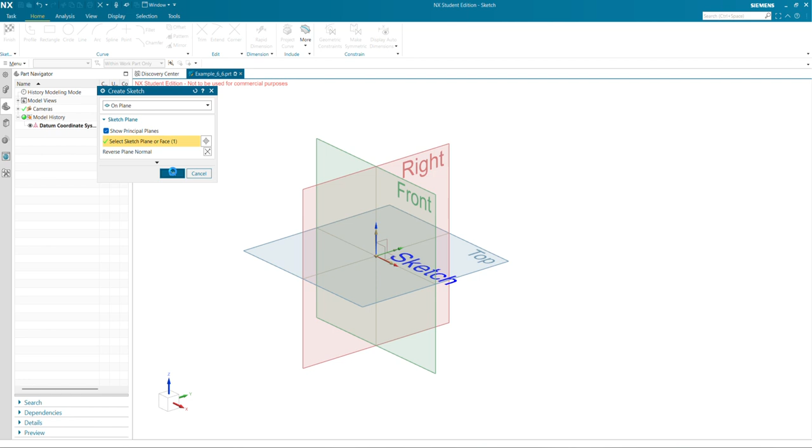So I'm going to start my sketch on the top view. There we have two circles of diameter 36. You'll see that circle has a diameter of 36, so I'm just going to create two circles with diameter 36.

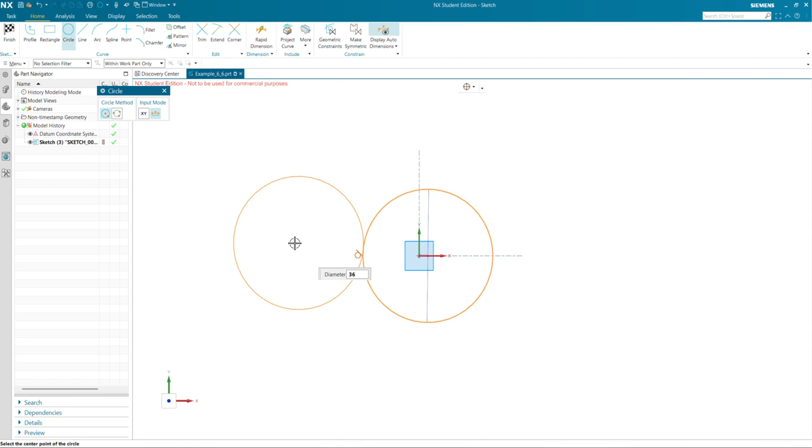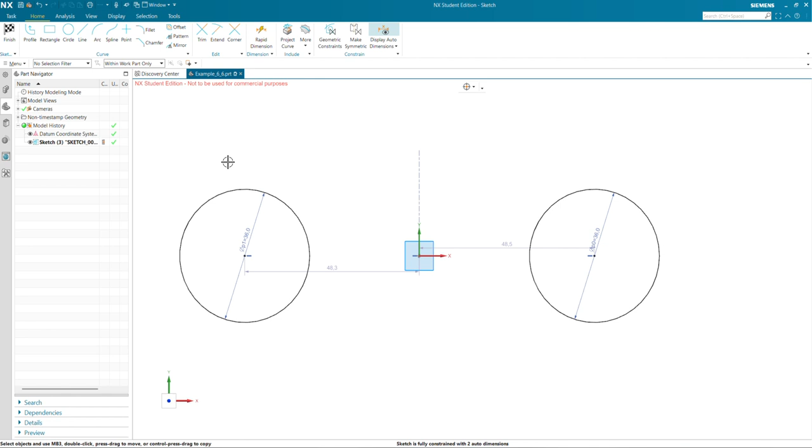Zoomed in a bit too much there. Just move. Okay, so I'm going to geometrically constrain them horizontally with the sketch origin, not point on curve. Inside, and then we have a dimension of 22.5 millimeters between them, so from that point there up until that point needs to be 22.5. Now it just needs one constraint because it can still move in the x-axis.

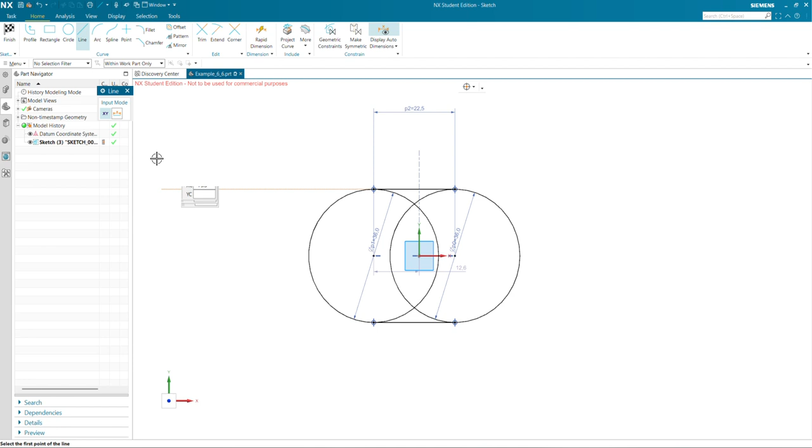To add that, I'm going to add a line between these two curves first, tangent to the curve of the circle, from there to that point, and then use my trim feature to trim away those lines. Now we still need that one dimension, so I'm just going to vertically constrain that point and the sketch origin. So that's the outer circle created.

I'm quickly going to create the inner circles as well, because they are extruded straight through. There are other ways of creating this - you can use a rectangle and then just use the fillet feature, but I think this method is the easiest.

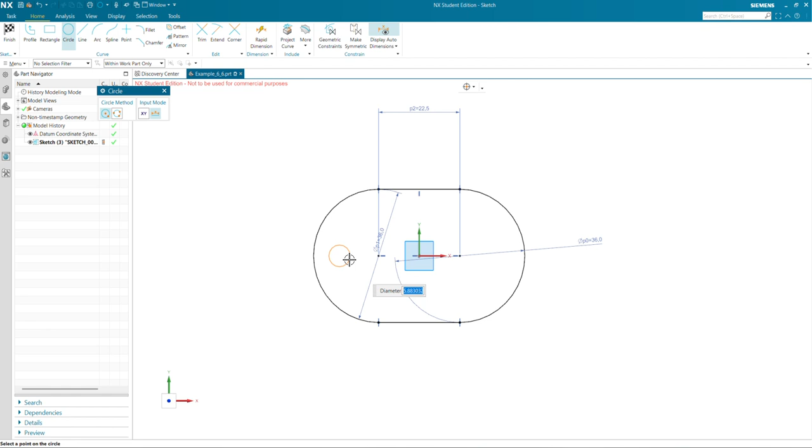So those circles have a diameter of 3 millimeters. I'm going to create them here - one there, and there as well. These need to be vertically in line with the sketch origin, or that point there. Once again, it's important to note where your datum coordinate system is. From the top view it's in the middle, from the front view it's also at that point, which is 5 millimeters from the bottom.

So that will also influence to which side I extrude this sketch of mine.

Okay, so then we have dimensions there of 13 and 13. So rapid dimension from that point there to that point needs to be 13, and from there to there needs to be 13. And then first geometrically constrain this one, and that distance I also know is 13 millimeters.

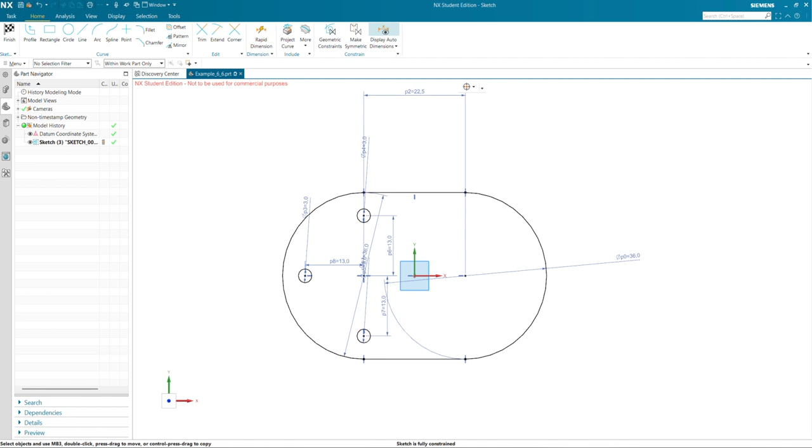Okay, so now it's supposed to be fully constrained. If it's not fully constrained, you either missed a dimension or missed a geometric constraint, which we cannot show you on the sketch, but it needs to come from intuition. So sketches should always be fully constrained, and I encourage you to keep it fully constrained as you go on with the sketch - don't try to make it fully constrained only at the end.

So I'm quickly going to mirror these curves - those three circles, with my center line being the y-axis. Okay, now I can finish that.

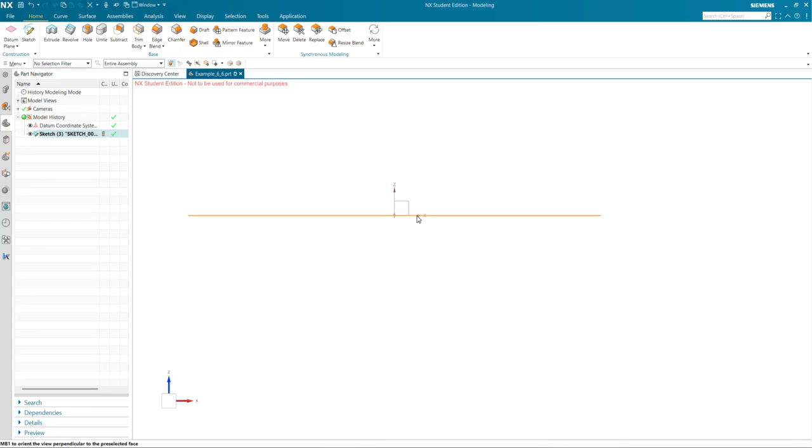So now you'll see my sketch is at that datum coordinate system, in the middle there. So to get it at the top there, I need to extrude the sketch downwards. So I'm just going to extrude it 5 millimeters to the bottom.

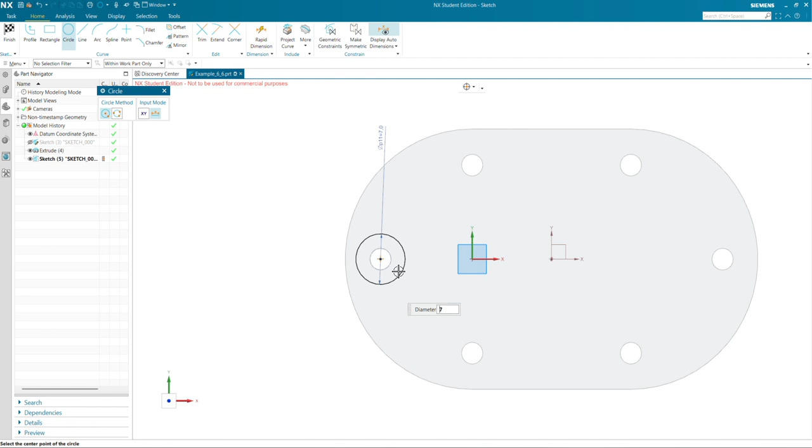Next, I'm quickly going to create those sunk in holes of 1 millimeter going down. So on that face, I'm going to create the sketch. Diameter of that is 7 millimeters. So there's one, there's one, there's one. So that one is constrained.

These two need to be constrained. So that's 13 millimeters, and that is 13 millimeters, and then also they need to be vertically in line with the sketch origin. Okay, sketch is fully constrained. Just mirror these.

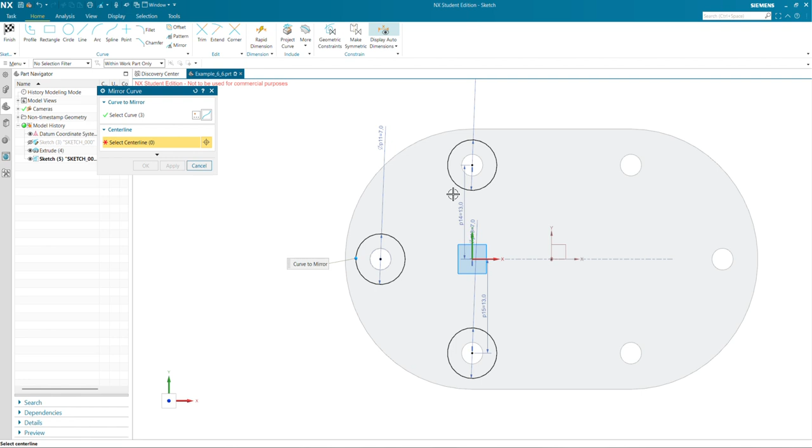It's easy as that, so use my extrude feature. They are 1 millimeter, and going to the other side using the infer tool to subtract them from that extrude.

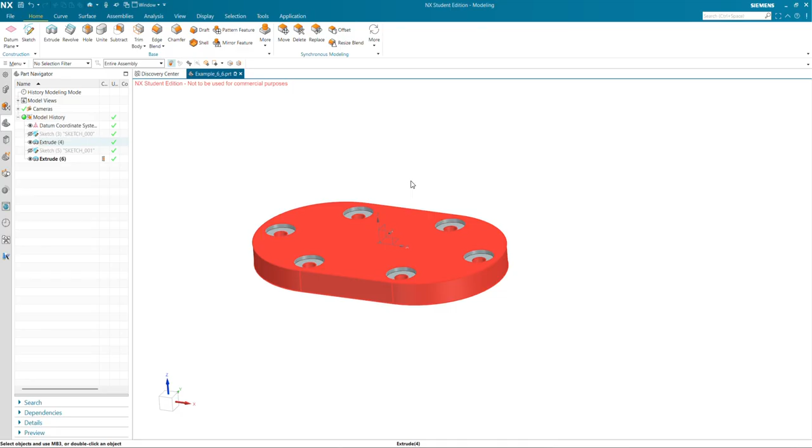The next part we can add is that oval there. It has a diameter of 15 millimeters, so I'm going to create it the same way as I've created this larger base part. Diameter 15 millimeters, so two circles, 15 and 15. They also need to be 22.5 millimeters apart.

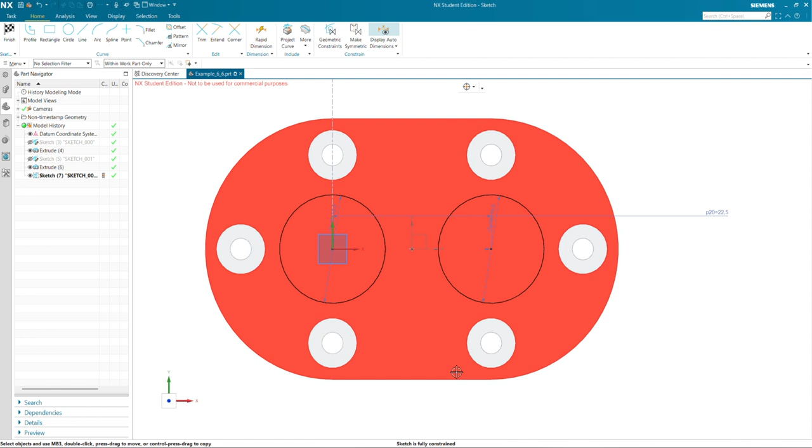The sketch isn't fully constrained with one auto dimension, and that's because I'm missing a geometry constraint, so those two need to be horizontally aligned. Sketch is fully constrained, add in my lines here. Once again tangent onto those curves, so from that line to that curve, trim those inner arcs away. Sketch is fully constrained.

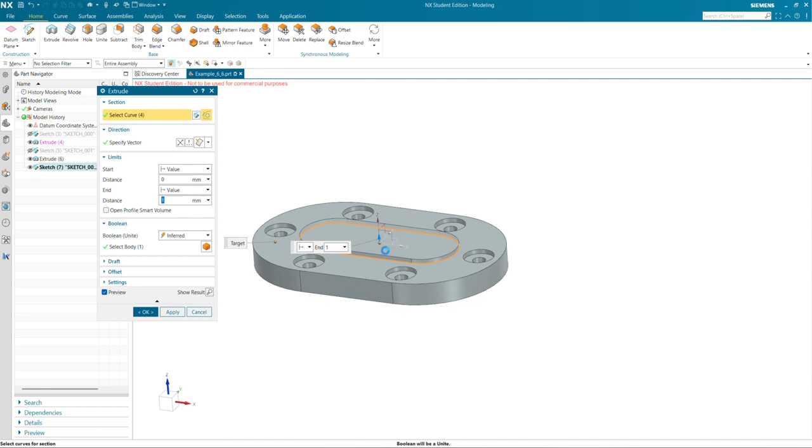I'm going to extrude that first. It's extruded 10 millimeters upwards. Okay, I'm going to hide that sketch.

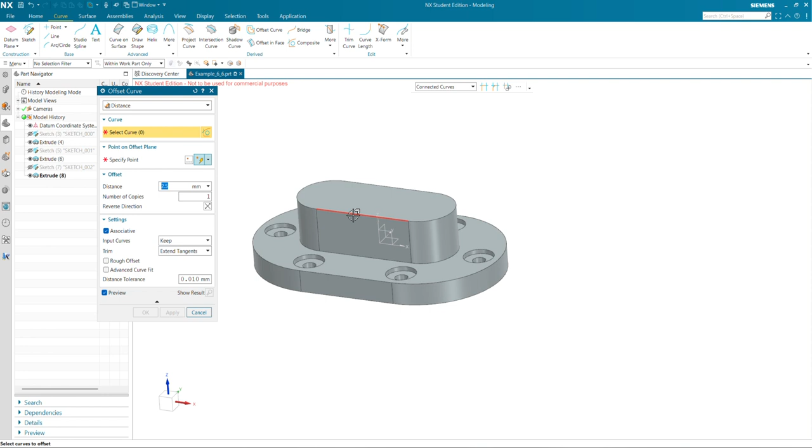Now I'm going to use the offset curve. So without creating a new sketch, I'm just going to create that offset curve to create that inner arc or oval. That needs to be 2.5 millimeters from the outer one, because the diameter of that arc is 10, and to get to a diameter of 15 you need to add 2.5 to each radius, so 2.5 millimeters is that offset. Just select these curves, 2.5 millimeters, click OK, and there you've created that curve.

That one is extruded 5 millimeters downwards, so use my extrude tool to the other side 5 millimeters, and it automatically subtracts it.

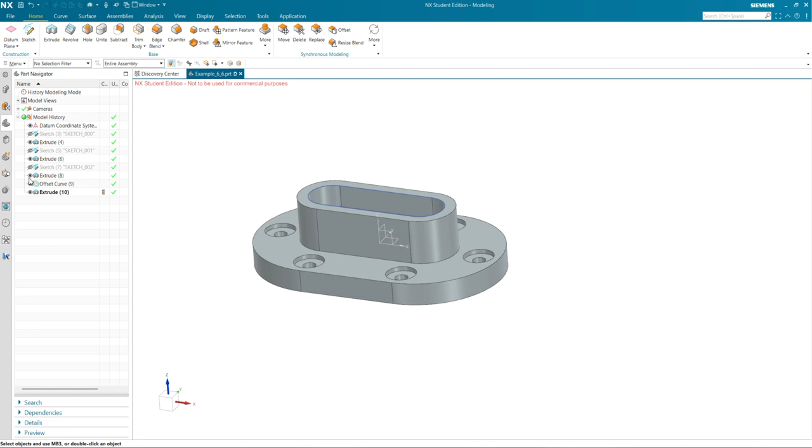Now the second last feature to add is those holes. They have a diameter of 5 millimeters, and they go straight through. So I'm going to create a sketch, not there, on that face.

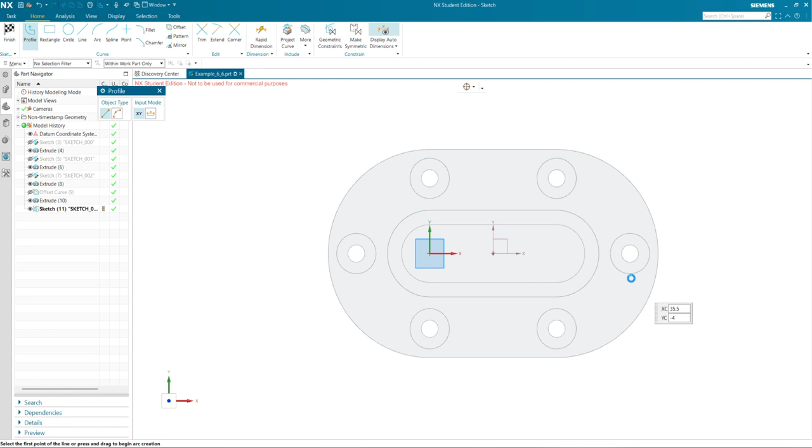We have a circle diameter 5, this side as well. Important, they are horizontally aligned, and then once again they are 22.5 millimeters apart. Finish that sketch, extrude it straight through.

So that's the circles added, and then the last feature is this feature here. I'm going to create a sketch on this face of the extrude.

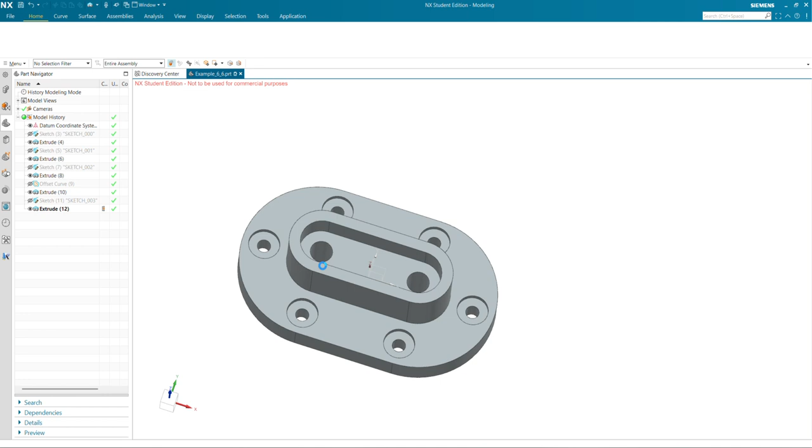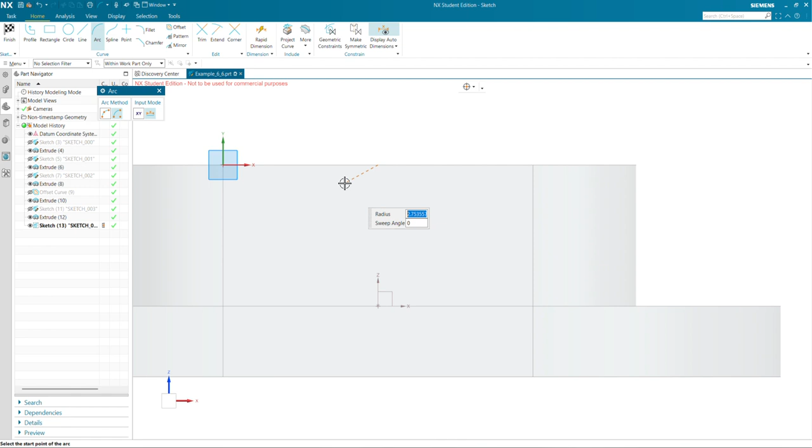Using my arc, the diameter is, or radius is 3, meaning that radius needs to be 4. So I'm going to use the arc by center point. My center point will be the center of this line, which is there, so it captures it onto that point. Radius is 4, and then to be able to extrude it, you need to close that loop.

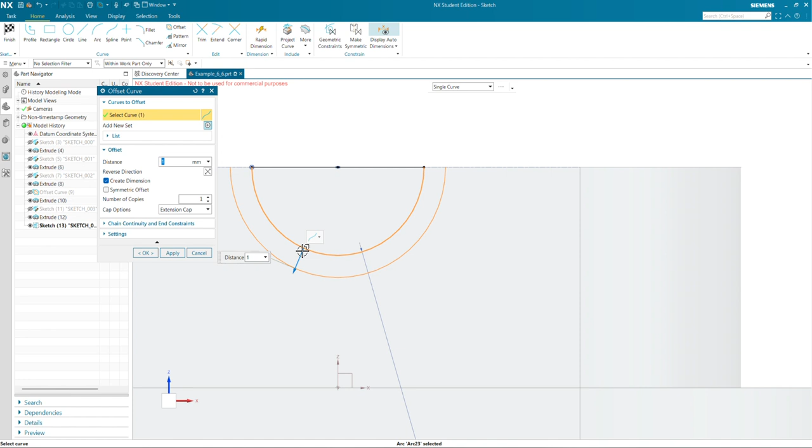My sketch is fully constrained. Once again, the inner arc I can either create with the arc or by offset curve, so I'm just going to use the offset curve. It goes inwards 1 millimeter, and then there's a line from there to there somewhere. A geometric constraint for that line is that it needs to be horizontal, and then you'll see that the dimension is 5.7 millimeters, not the face, but that dimension is 5.7 millimeters. So then I can just trim these lines here.

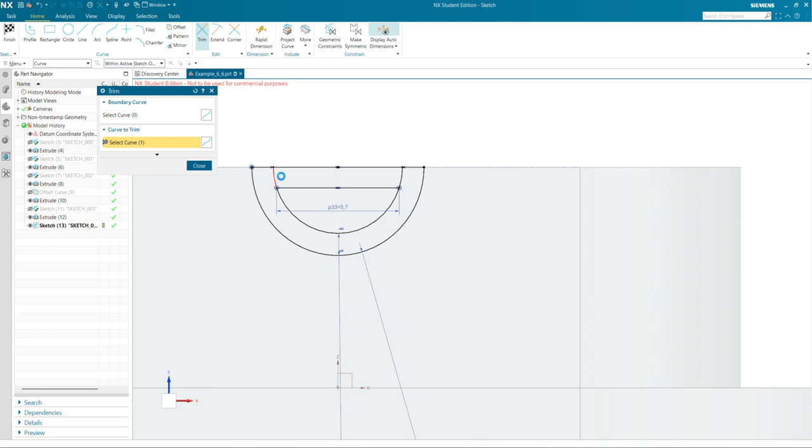Make sure my sketch is fully constrained, which it is. Finish the sketch, and then you'll also see that it's extruded 10 millimeters outwards. It doesn't go through that wall there, so it just stops there. I can just use my extrude feature, extrude it 10 millimeters, and click OK.

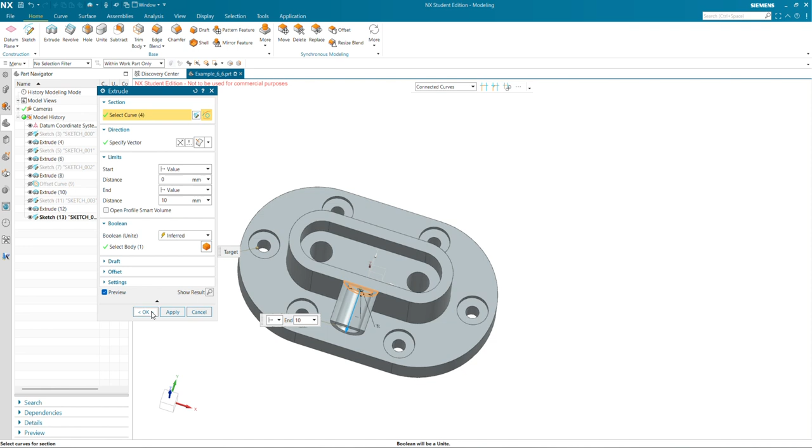Important, you need to make sure now that the entire model is united, so you can just click on the unite tool. If the entire thing is highlighted, then it is united.

Once again, we're going to ask you for the surface area, the center of mass, the mass, and the radius of gyration. The material for this is aluminium 6061, so I'm just going to say menu, tools, materials, assign materials.

I want to assign it to this body, so I click on the body, aluminium 6061, click OK. To make sure that it's assigned, you can just once again go to Tools, Materials, Manage Materials, and make sure that there's a checkbox to the right of that material.

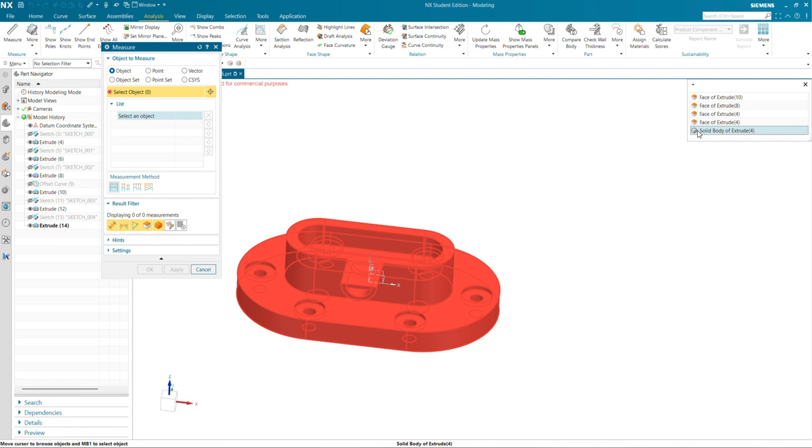Then to measure that, you just go to Analysis, click on Measure, right click on this body, say Select from List, click on the solid body of the extrude, and it displays all of the details to you. We want the surface area, the center of mass, the mass, and the radius of gyration. So you'll need to enter that into Ifundi, and once you've done that, you have completed your homework.

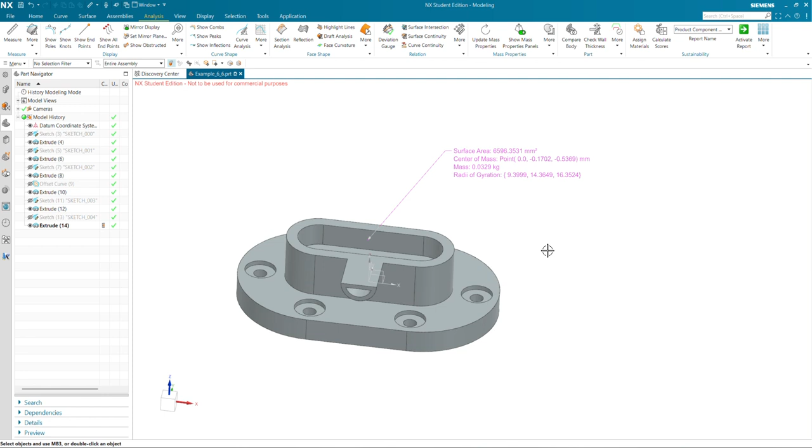So I hope this example helps you a bit in your homework and for preparation for future tests. Thank you for watching.